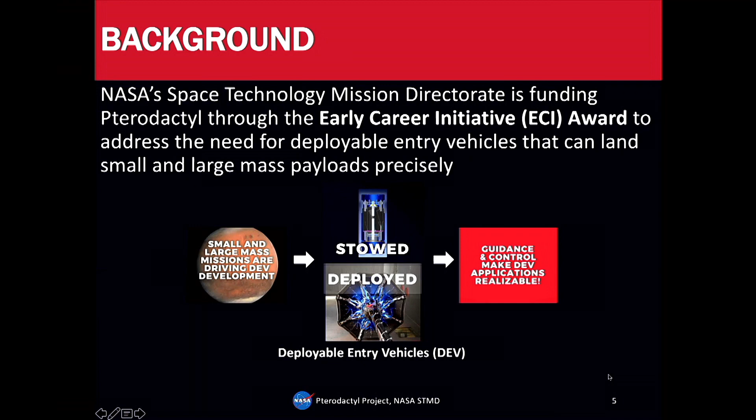So if you're on the moon and you want to send a sample back, or do something cool, and you don't need a large spacecraft like the Apollo capsules, there's a new class of vehicles that can achieve this called Deployable Entry Vehicles. These small and large missions are driving this. A deployable entry vehicle doesn't have that rigid body like the Apollo capsule, which is stowed and then deploys during entry. The one we're working with works like an umbrella - stowed like an umbrella, then deploys during entry.

The challenge with these vehicles is they don't have a rigid form. Imagine a bowl with a lid, like Tupperware - it has a rigid form, so you can put things on the back of it, you can stick things there. Well, these don't have a rigid form, and traditionally entry vehicles were controlled by putting thrusters on the backs of these vehicles. That's how we've controlled entry vehicles for as long as I can remember.

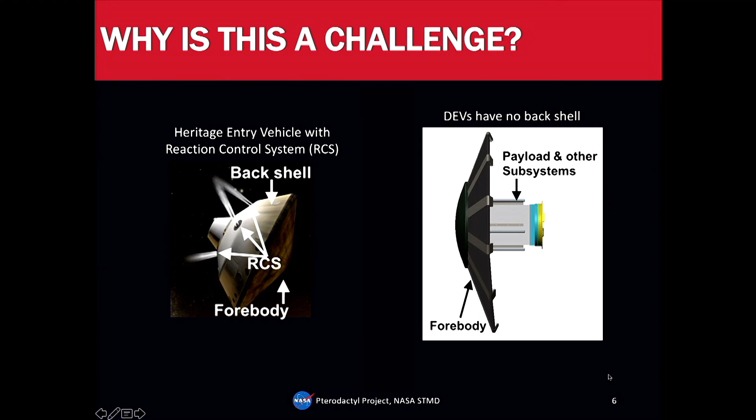So DEVs have no backshell - you have your payload and other subsystems in the back, and that's the forebody. So how do you control this thing? The research question we're trying to answer is: what control system can be integrated into the DEV to enable steering to a target location precisely? Remember, we want to improve precision landing.

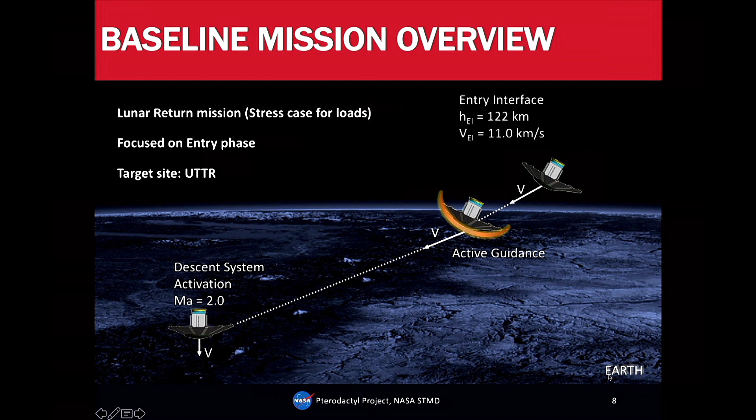Here's the baseline mission we're looking at. On the left side, you see the descent system activation. On the right side, you see where active guidance starts. When you think about entry, there are multiple phases - entry, descent, and landing. We're concerned with the entry phase of the vehicle moving through the atmosphere. We're looking at a lunar return mission, kind of a stress case for loads, which is why we chose it, focused primarily on the entry phase - that's the entry interface, altitude and velocity. We're not concerned with descent activation or the parachute or landing system. We're looking at that footprint, the space where you're supposed to be targeting, and how well you're doing with that.

Offset the CG. But why would we consider this vehicle asymmetric? Can I point with this? Is there a laser pointer? Top button.

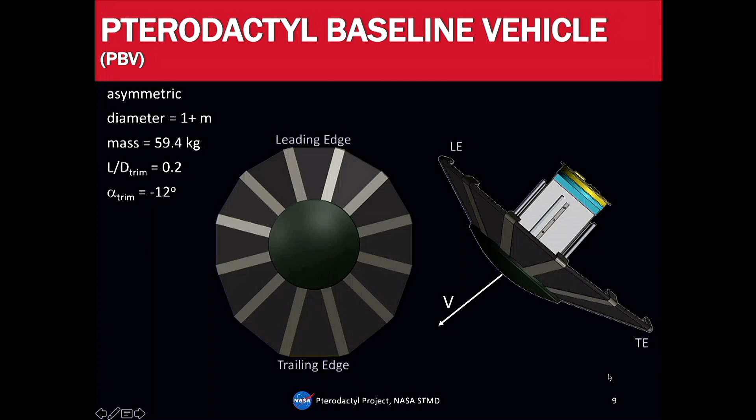So as a controls engineer, I care about, one, taking the aerodynamic data that basically describes this vehicle, taking the mass and inertia properties of this vehicle, and then understanding it. First you want to have an intuitive understanding of this vehicle, what it can do, what are its limits. Create a representation of the vehicle, and I'm going to show some slides about that, and that's just the math. Looking at that vehicle in the previous slide, what does this mean? What can the math about this vehicle tell me about what I can do with it?

Then utilize this information to command the vehicle to follow guidance trajectories. Guidance is where do you want to go, so guidance tells me this is where I want to go, and then I use my controls information to move the vehicle there. It can be position, X, Y, Z, it can be velocity, it really can be any states. I want to command the states to move from where they are now to a desired state. That's what controls is. So now you just got a crash course on controls, aerospace engineering controls.

How many people here are going to be controls engineers?

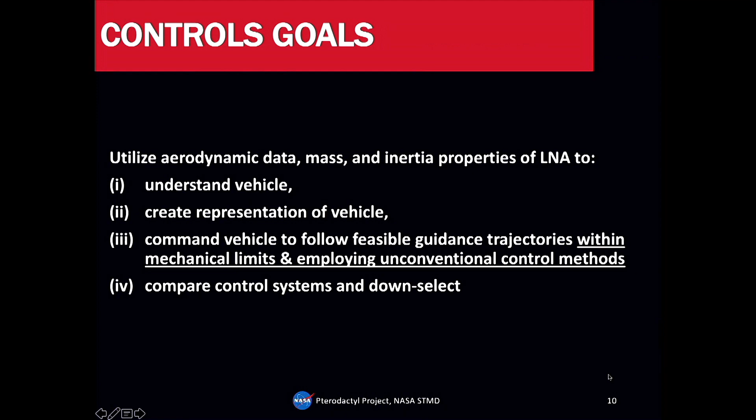So we'll compare the different control systems that we're going to look at. This is more for the group as a whole, and here are the control systems that we examine.

The first one was reaction control systems, as shown for the heritage entry vehicles. What they typically have are thrusters on the backshell that fire, and they can fire in pairs to rotate the vehicle one way or another.

The second is flap control systems. Does anyone who isn't an aerospace engineer know what a flap is in terms of aero? It's like a wing. Have you ever been on a plane and looked out the window at the wings? You see these flaps on the backside going up and down, and you wonder what that is. I had a friend ask me why don't they control those things. I said, those things are used to control the plane. It's mind-blowing, right? They're aerodynamic control surfaces, and when they move one way or another, the plane does something.

Sometimes you'll see the flaps go up on the right side and others on the left side, and your plane will roll, conducting some sort of maneuver. Those are actually control surfaces. So instead of your engines firing, you can put flaps and deflect them one way or another to make your vehicle roll, pitch, or yaw.

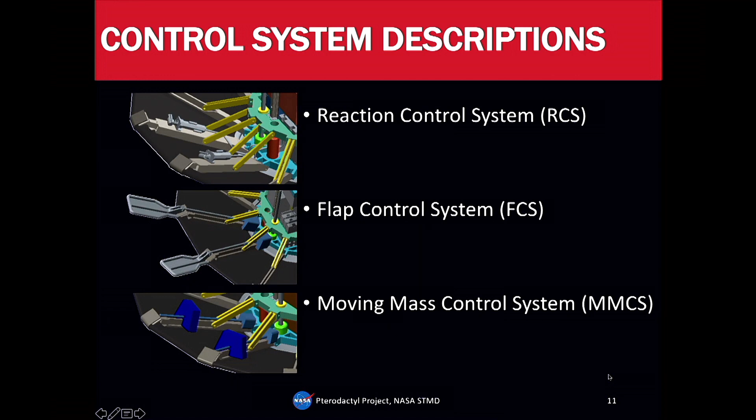Imagine if I didn't have solid footing on the ground and had my hands out like this, and then you place a heavy weight on one end. What would likely happen? It would roll, it would rotate along this axis. So if you move mass from one side of a body to another, you cause it to rotate. You could use that to control the vehicle, rotating and following guidance commands.

So we have reaction control systems, RCS, flap control systems, FCS, and moving mass control systems, MMCS. I might use these interchangeably, I won't quiz you on it, so if you don't remember, that's fine. These are the control systems we look at.

What's the flap design like? If you remember the Pterodactyl baseline vehicle body from earlier, we put flaps on it: 2 on the top, 2 on the bottom, 2 on the right and left. 8 flaps total to increase control authority and reduce multi-axis coupling, because this vehicle is not symmetric.

When you roll or yaw it, you get some coupling in ways you wouldn't really expect, because it's not symmetric. If it was a symmetric vehicle, you wouldn't have as much of that. And to reduce that—we already have a question: why was it designed asymmetrically?

There is a symmetric version of the vehicle, but this gets a little interesting. Because it's asymmetric, the lift-to-drag ratio, the L over D, is higher. And when you have a high L over D, the vehicle was actually designed to follow bank angle commands, so you can do more in terms of guidance. That's why they added the longer gore and the ribs on the bottom.

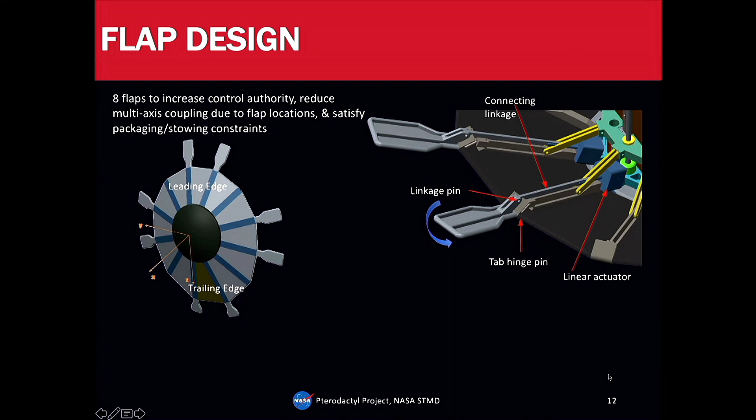The asymmetry will manifest in different ways as you go through the design process. But from a flap design standpoint, or from a controls standpoint, I didn't really care about the asymmetry itself. What I cared about is how much control authority could I generate. The flaps had to be sized big enough that when I deflected them, they could do what I wanted the vehicle to do, to fight any coupling or deal with issues. That's really what I cared about.

Because what I'm thinking is the flaps on the lighter side would have to be bigger than the ones on the heavier side, correct? Possibly, if you're trying to generate equal and opposite commands, but you might not, right? There's some L over D consideration. What if you want to perpetually remain in this orientation, then you might not need to pitch up as much as you need to pitch down. So it depends on what the goals are, and that's why there's this interplay between guidance, where you're trying to go, controls, how you get there, and navigation, where you are.

Yeah, these are great questions. So this is what the flap design is. Just some more information about the vehicle with flaps integrated, and then the flaps can go from -45 degrees behind, to 20 degrees into the flow. These are just aero, packaging, and aerothermal constraints. We're talking entry, so if you go too far into the flow, you start to have heating restrictions and shock waves and other things induced in the flow.

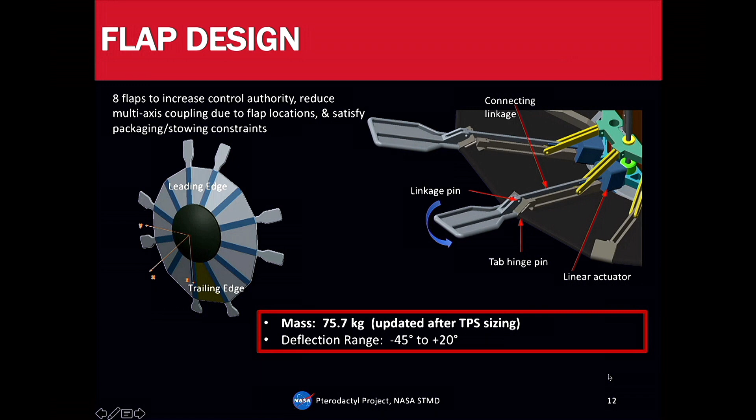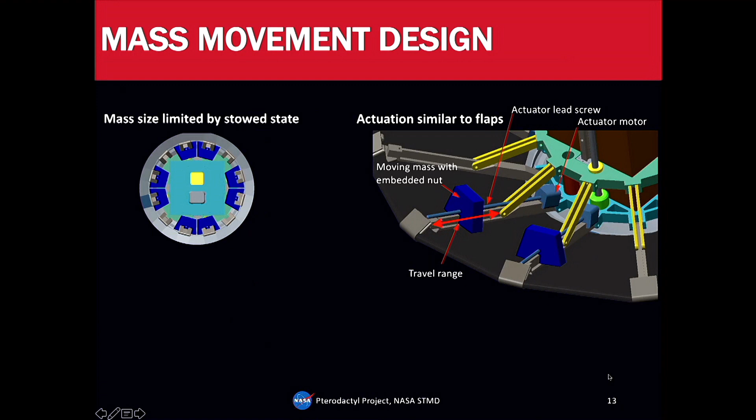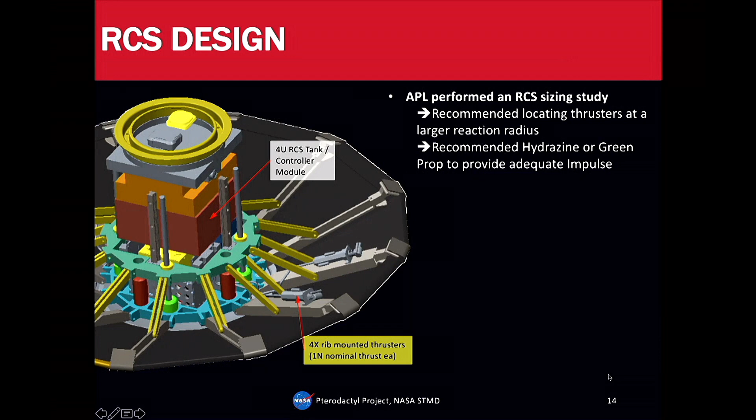So this was a bound placed by us for the vehicle based on packaging and aerothermal constraints. The moving masses, similar to the flaps, we put 8 of them on there, with actuation similar to the flaps, and mass size limited by the stowed state. First cut starting. Same with the RCS, we had APL do the sizing study for the reaction control systems, and they recommended locating thrusters at a certain reaction radius, as well as the kinds of impulse requirements we would need. So we have 4 rib mounted thrusters that can generate 1 Newton nominal thrust. Don't worry about that detail, but basically this is an overview of the flap control systems, the reaction control systems, and the moving mass control systems.

So I talked about bank angle commands for guidance. Heritage systems would typically do bank angle, where basically they're changing one of the important aerodynamic parameters, the bank angle, to modulate lift. So you have your velocity vector, and if you change that angle, you can change the direction the vehicle is facing or where it's going.

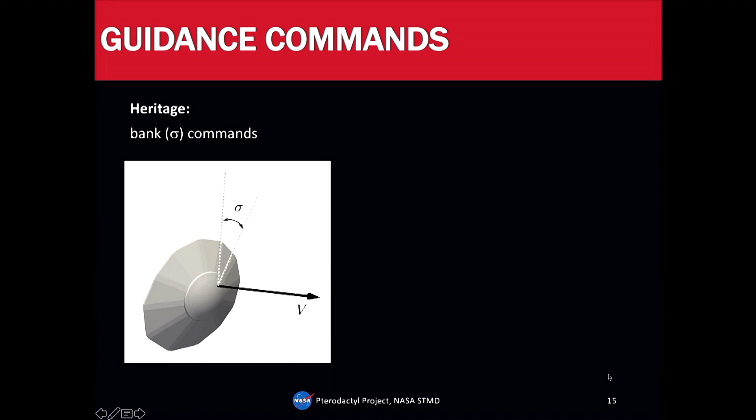But you can also do another thing, where instead of just that one coupled angle moving your lift vector, you can change your angle of attack, which is how you're pitched up, and you can change your side slip. If you want to increase your downrange, you change your angle of attack. If you want to steer left, you change your side slip. So remember: angle of attack is for up and down, and side slip is for left and right. This is an alternative to what heritage vehicles typically do for guidance. So you can do bank, or you can do alpha-beta, which is angle of attack and side slip. I'll typically just say bank or alpha-beta.

We started out with this baseline vehicle that already existed. We're calling it the Pterodactyl baseline vehicle because we had to make some modifications to it. That baseline vehicle is based off a lifting Nano-ADEPT vehicle.

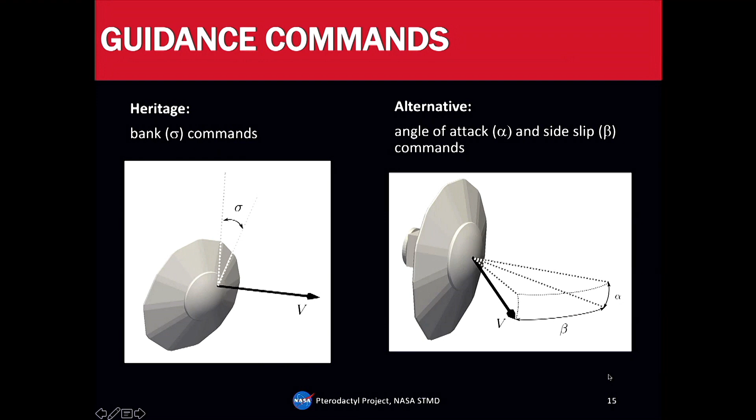So we took that base vehicle and went through the packaging, the CAD models, and basically came up with something where we could add the flaps, RCS, and MCS.

We started with the baseline vehicle because we were concerned about what we were trying to do. We weren't designing a deployable entry vehicle, but designing a system that could control and integrate a control system on an entry vehicle. So we had a starting vehicle to work with, which raises an interesting question: give me a deployable entry vehicle, or any entry vehicle at all, and I can control it in unconventional ways.

So flaps, moving masses, and RCS give us the capability to do alpha-beta control or coupled downrange control. For the flaps, it's the flap deflection angle into or out of the flow for each of the 8 flaps. For the moving masses, it's how far you move each mass along the ribs—imagine this umbrella with masses on each rib that you move in and out to control. For the reaction thrusters, it's simply firing on or off. Those are the control outputs.

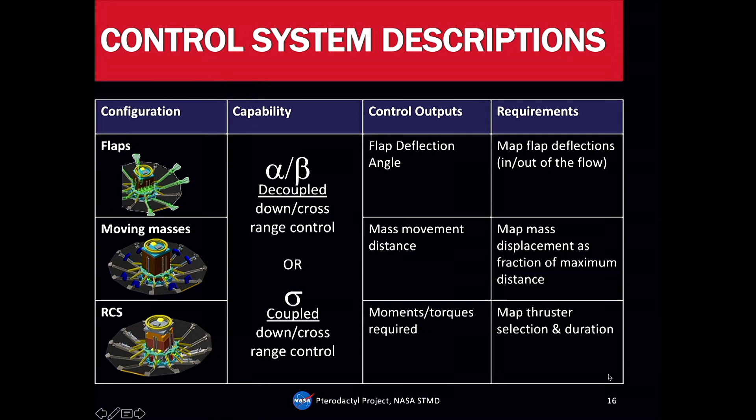For one, you have deflection angles. For the other, how far are you moving the masses. For the third, are you firing on or firing off.

I assume you have software that's going to calculate your thrust and the duration of fire. Where is that located? Is that software on the vehicle or somewhere else? I will get to that.

But that really is the crux of this—you have all of this information, so how do you simulate it? Entry systems are pretty simple in that they don't require a significant amount of onboard computation. It's typically done on board, but you have all these pieces from different places: aerothermal, aerodynamics, controls, guidance, all working together. A lot of this is done offline, which is what I'm going to show you, and then it becomes a relatively simple, easy computation that can be done on board.

So we have all of that information, and then we want to develop a simulation model to design control, now that we have all these different pieces. Where's the math? Who's excited about the math?

Yes, okay, so this is Aero 101 that I got from the NASA website. I was putting these slides together and thought, I don't really know my target audience, so let me just give you some—you're gonna enjoy this. This is publicly available information you could teach kids, literally, like forces and moments on a plane, and you can teach yourself too. I didn't like math growing up, but this stuff is easy.

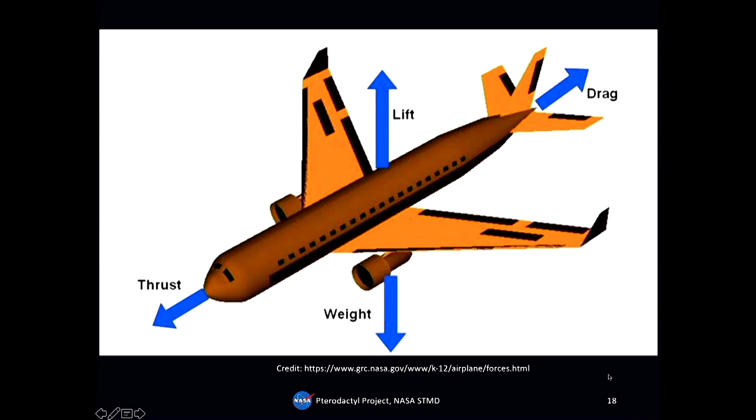Remember those flaps I talked about? Next time you're on a plane, look out the window at the wings—you'll be mesmerized by the way these things move up and down on the edges.

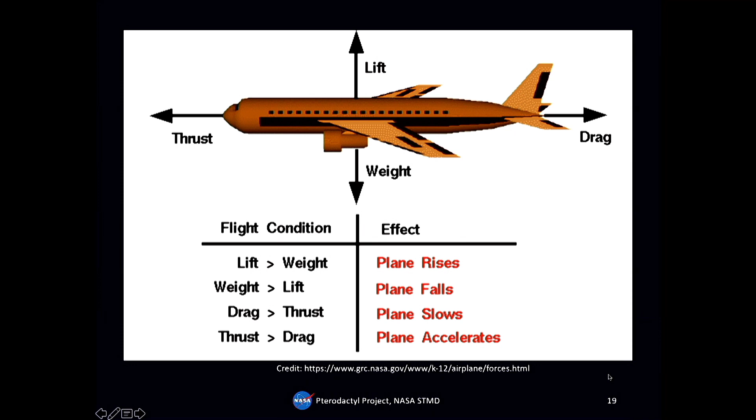When your lift is greater than weight, the plane goes up; when it's less, it goes down. When drag is greater than thrust, the plane slows; when thrust is greater than drag, the plane accelerates. F equals ma—force is mass times acceleration. Okay, you're with me? Then there's more—I showed forces in different directions, but there's more.

There's roll, pitch, and yaw. These are called moments—or what's another word for moments that mechanical folks typically like? I'm an aero girl, so I call them moments, but mechanical people call them torques. People are more familiar with torques—they've heard of a torque.

A torque is a force moving through a distance, right? So put weight here, that's a force. Boom, that's the distance. So force moving through a distance, that's a torque or a moment. Depending on what direction that moment is happening is what determines if it's a roll, a pitch, or a yaw. But they're all torques, they're all moments.

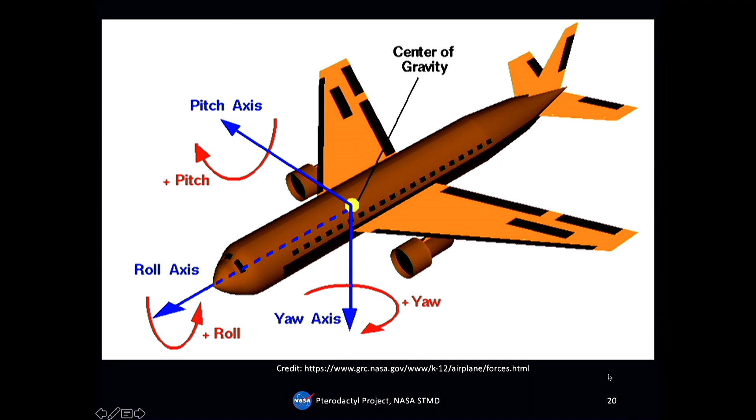A roll is a rotation about kind of like the nose coming out. This is a really great way to explain it. If your plane is like this, this is a roll when it's doing this. Can everyone see that? This is a pitch. And then this is a yaw.

So your force is basically just this or that, but depending on what axis you're rolling around, that's roll, pitch, and yaw.

So I put this here to show, before I get to the equations, that I'm going to show some equations, but I don't want you to get hung up on them. There's just a few key things I want you to take from these. Don't ask me about these equations, it's going to take 3 hours to get to all of this.

I just want to show you that this vehicle can be represented with a set of equations of motion. These equations of motion are typically nonlinear, but they are dependent on the forces I just showed you - drag, lift, and side forces - and the moments I just showed you. That's what's key, these things go into the equation. So when you talk about representing a vehicle, you have to understand how that vehicle depends on these things, what all goes into its representation. So it falls out of the math.

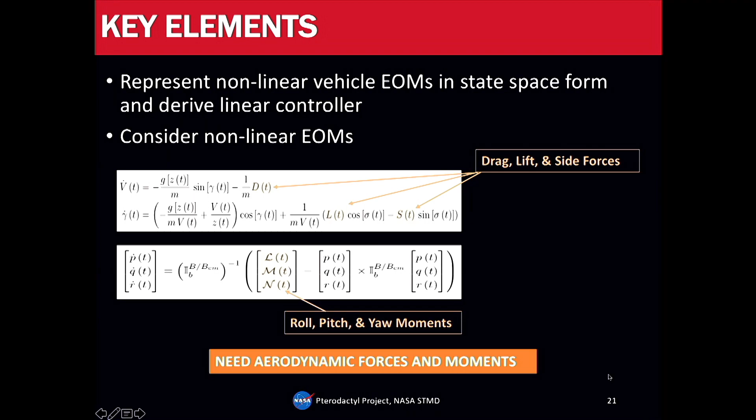So you need those aerodynamic forces and moments. These equations are pretty standard for an entry vehicle. What changes is what those aero forces and moments are that are going in. What is the inertia? What is the mass distribution? Inertia is how mass is distributed across a body, through a body. So what are those parameters that change? That's what really changes, because all these things go in here, and a vehicle will differ from another vehicle depending on what you fill these equations with.

And so these forces that I talked about - side force, lift force, drag force, roll, pitch, and yaw moment - they have coefficients. An aerodynamicist will give me these coefficients.

And for an aircraft, because we don't go that fast through the atmosphere - I mean, you might think we go pretty fast, but we don't - it still takes us 6 hours to get to DC.

6 hours. Deb, 6 hours. Why am I in a plane for 6 hours when the technology exists that will get me there in an hour and a half? It's just a little loud. But people don't like that it's loud, they complain. This is a true story, they actually complain, that's why we don't do it. Congress passed a law that says you cannot fly supersonic over the continental United States. But it exists. So next time you're stuck in a plane for 6 hours, just know it's because people complained that it's too loud and their dogs and cats are going crazy. True story, it's in the papers.

But airplanes don't go really fast, so your aerodynamic coefficients don't depend much on that. They really just depend on things like angle of attack, pitch, and deflections.

But when you get into space, spacecraft entry, there's a lot that's changing - your Mach number. Who knows what Mach is? It's heavily dependent on speed, but it's in relation to the speed of sound.

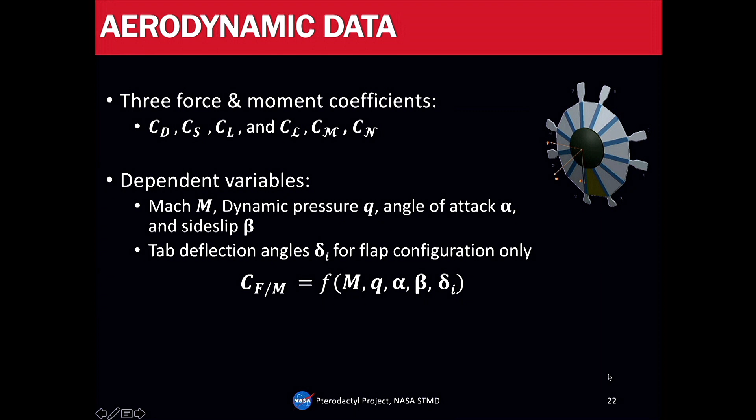So you need your aero forces and moments to characterize the vehicle and design the controller. Your aerodynamic forces and moments are dependent on these coefficients, where these coefficients have dependencies on the baseline vehicle, and they also have dependencies on the flaps when you're looking at the flap configuration. So if you're not looking at the flap configuration, these terms on the right side just go to zero. For the flaps, because they're aero surfaces, they also contribute as well.

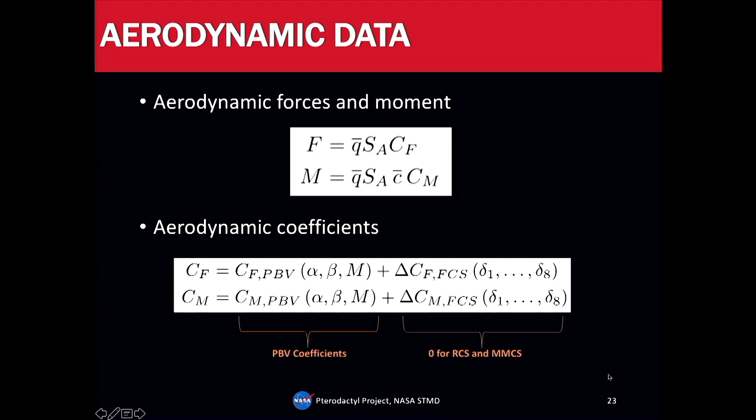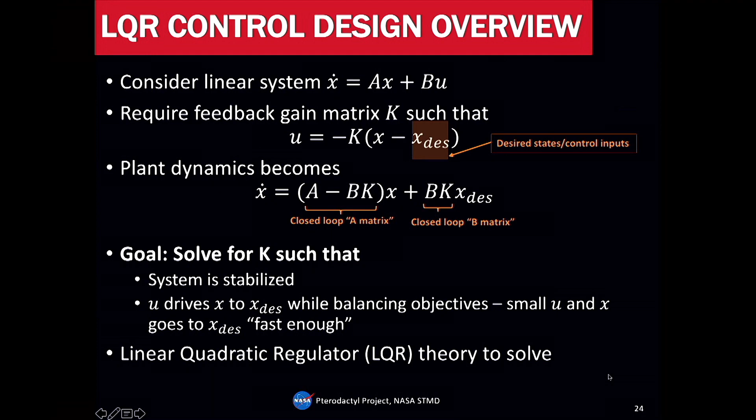What are the objectives? How fast you want to get to X desired. You're here, you want to get there. How quickly do you want to get there? Do you want to leap, or do you want to walk slowly? These are all things that you, as the controls engineer, want to figure out: how fast do I want to get there, and how much energy am I going to use? How much control effort am I going to use? What's worth it to me? Is it worth it to jump and be out of breath and then come back here? Maybe, maybe not, if I'm going to jump and then just go home. But if I have to come back here and speak, I'm probably just going to walk. So you're balancing all these objectives.

That's what controls is. It's so cool, right? It's like, how fast do you want to get there? How quickly do you want your states to get there? How much control effort do you want to use? These are all things that go into that. And you work through all of that so that you can get your control design.

We did this linearization split based on something that I did in my thesis for my PhD, such that each time we get an update from the aerodynamics team—remember, this project is multiple people working together—the aerodynamicist gives me info, and I'm like, okay, this is what we can do with this vehicle. Then I pass that onto the guidance team, and they run the trajectory knowing the limits of control, and we check if it's good enough, and then we work back. It's a very, very iterative process. So each time the aerodynamicist gives me info, I can work through that entire process, or I can split it such that it's not everything that's changing at every time.

So this is really, really cool, and I'm going to show some references if you have questions. This has all been published since my PhD days a few years ago, so it's public information, and you're not basically linearizing each time.

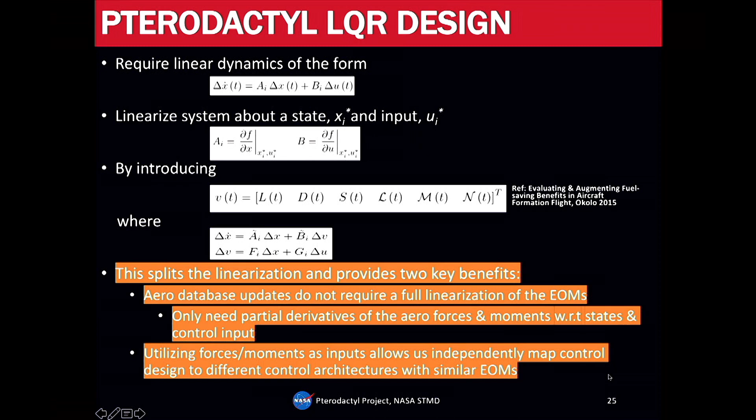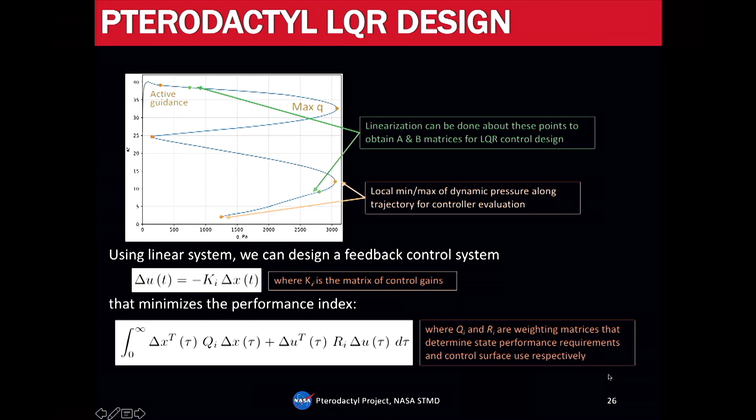If you think about that entry phase I showed you, during entry the vehicle goes through different Mach numbers and different dynamic pressures, M and Q. And you can, like I said, linearize your equations of motion and then evaluate at different points. Your vehicle is represented by a set of nonlinear equations, but you want to design a linear controller for them, because linear is good—linear is easy, right? So you linearize in a region and say, this is valid in this region.

And then you can test it in another region and see how well you do. For most entry vehicles, because things aren't as crazy, you're usually fine. If you linearize here, you can usually fly here with the same assumptions you made, and things kind of work out. So you can pick a point and linearize. We did two, but we ended up just using one because one worked fine.

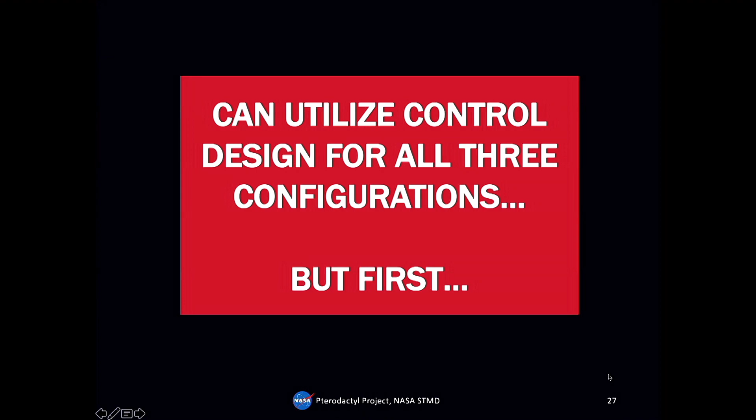And then you can utilize that controls design for the three RCS, FCS, and MMCS control systems. Who remembers what MMCS is? Moving mass control systems. Yes, you're with me. Okay, so you can utilize the control design for all three configurations.

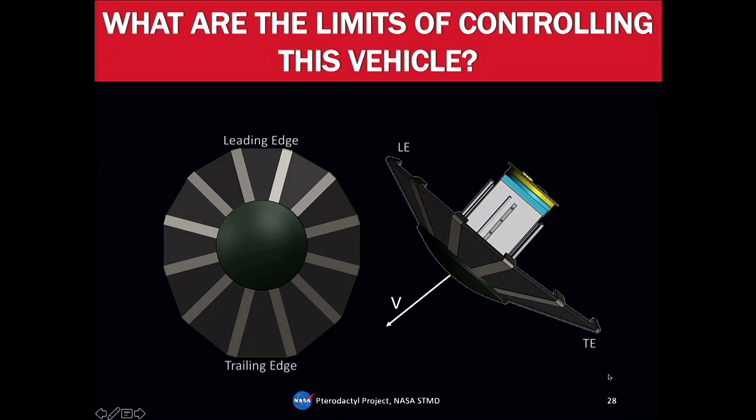But first, we want to understand in what regions can we control this vehicle? What are the limits of controlling this vehicle? This is going to get into that asymmetry versus symmetry conversation, and where we're limited, and what happens when you try to control, and what are the things that happen. So what are the limits of controlling this vehicle before you even start the process?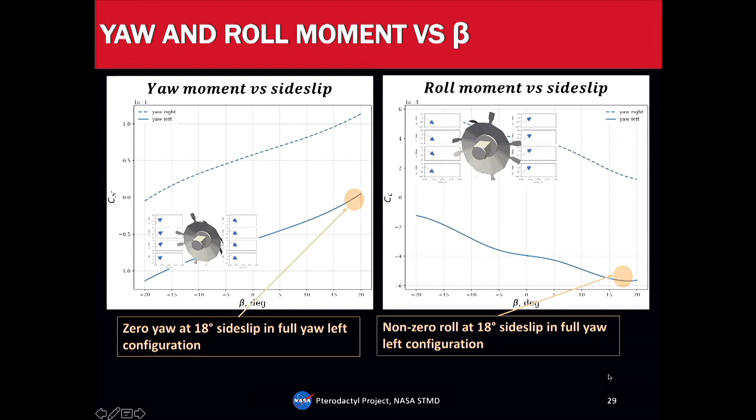But we designed these controllers to ideally be able to do alpha and beta. We weren't thinking about roll. So what does that mean for us? Yaw induces a roll moment that the vehicle needs to trim out.

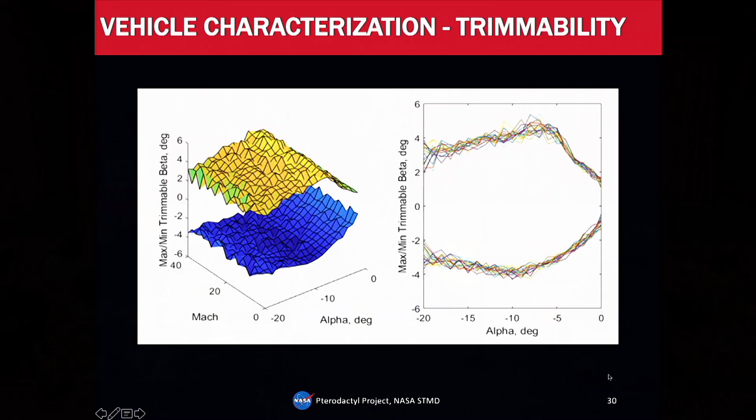And this is just some additional plots saying, as a result of that roll moment that the vehicle needs to trim out, your side slip range is limited. So you don't want to yaw too much and then induce a roll that you can't control, because you didn't design to be able to control that roll. So now you kind of limit yourself in terms of side slip so you don't induce as much.

And then when you limit yourself in terms of side slip, how good is your performance? How good is that guidance trajectory that's really depending on it? Your guidance is thinking you have more to work with, but you don't. So what does that mean for you?

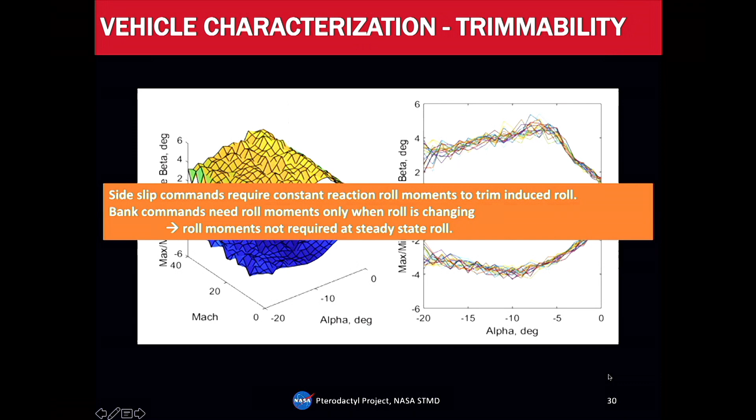So basically, with the vehicle and the configuration we looked at, the side slip commands require constant roll reaction moments to trim. And that's for alpha, beta. Remember I said there was bank angle command and there's alpha, beta. Bank angle requires roll moments only when the roll is changing.

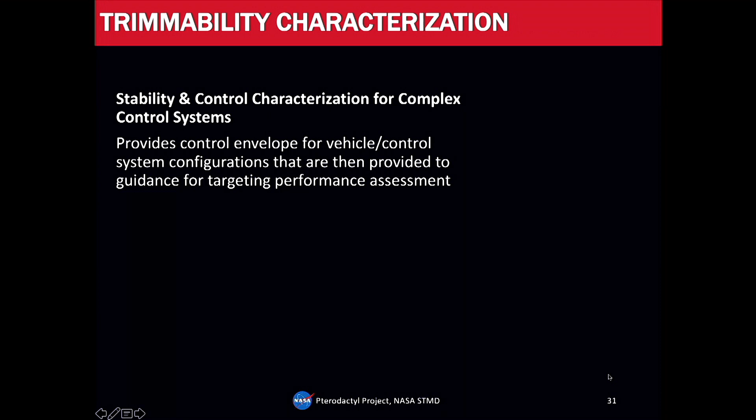So what we showed with this trimmability characterization, how well we can trim, is that the control envelope for where the vehicle can trim will guide where guidance goes. What does your guidance trajectory look like? How far can you go? Because we're telling them now, okay, we can't go as far.

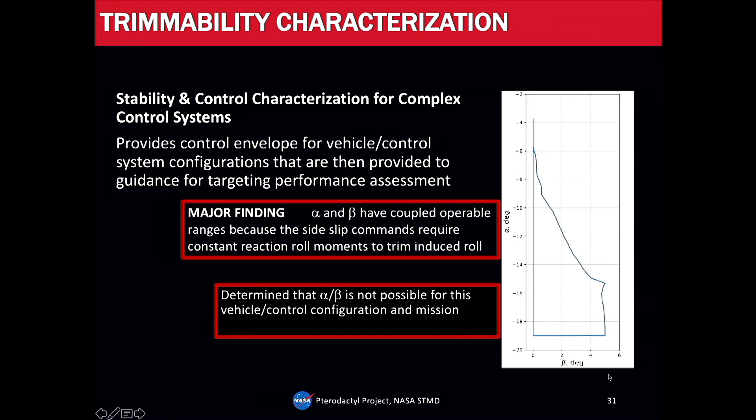The big finding is that alpha and beta have these coupled ranges due to that roll-yaw coupling. Our window here is where we can operate successfully, and this window might not be sufficient for an optimum guidance trajectory. So alpha beta is not possible for this vehicle in this control configuration.

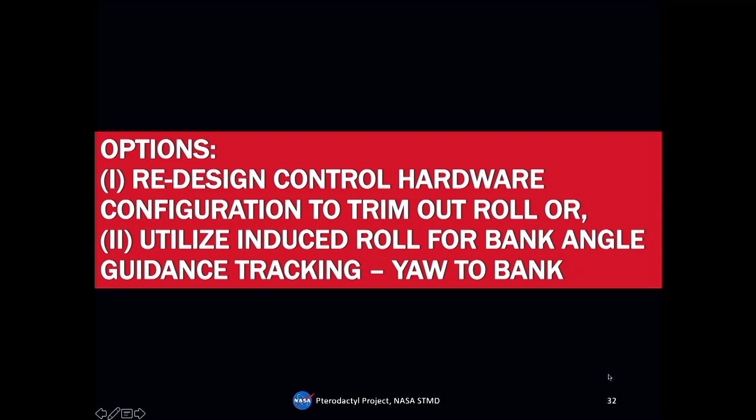So we can either look at bank, utilizing the induced roll for bank—remember I said we have bank and we have alpha beta, that vehicle was designed for bank with that asymmetry—or we can redesign the control hardware to now have the ability to trim out any roll that's induced. For these results, I'm going to show you the latter. We're working on doing the former now, and maybe that'll be another presentation.

I don't know if I have the bandwidth, but we're working on modifying the control system to say, okay, now we're only going to do bank. Same thing, we're looking at the flap deflections, the moving masses, the jets on and off, and saying how well can we follow bank angle commands of rolling.

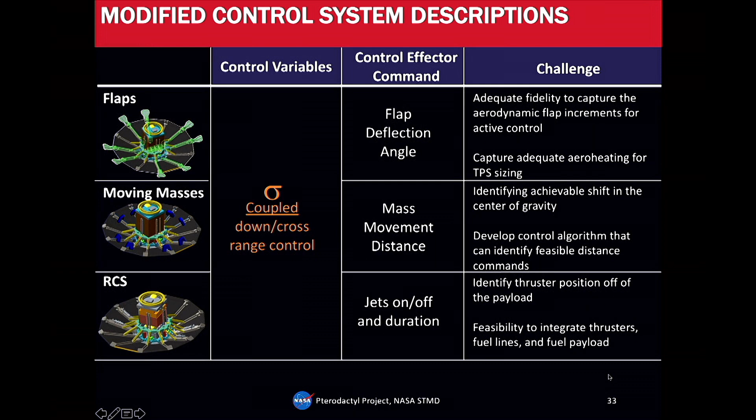So this roll is a problem, but how can we use it to our advantage for bank angle guidance trajectory tracking? So we did this yaw-to-bank architecture and control design where we take our gains that drive the bank angle and convert them to basically a side slip. We know we have this coupled side slip roll interaction. Now we take that side slip command—there are papers on this, I'll show the references, so you can take all the pictures you want, or just go get an AIAA paper. So you take that bank, convert it to the side slip command, and that side slip drives your bank angle utilizing that coupling.

Question: If you get into an uncontrollable pitch or roll, would that lead to a perpetual motion situation? Yes. Not much friction in space? Yes, yes, you can get it.

And a lot of that characterization can be done way beforehand. There are things called stability derivatives, static stability derivatives, dynamic stability derivatives, that should either be positive or negative. If it's negative, how negative is it? If it's positive, how positive is it? And if you're not stable, the linear quadratic regulator design that I showed does two things: it'll control and it will stabilize. Ideally you should be able to control and stabilize, but you can check those things, because if you're not stable and you get into a mode like that, you can start to roll to infinity and that's it. So you can check it before you fly—check, remove before flight. You can check these things beforehand.

So that's what goes into understanding the vehicle, that intuitive understanding, because it's garbage in, garbage out. If you don't understand the vehicle, if you don't understand what you're doing, you start with uninformed physics. These equations exist, you can always go through this process, but if you don't understand, it's garbage in, garbage out. And then you have a problem that you're having to explain to the world.

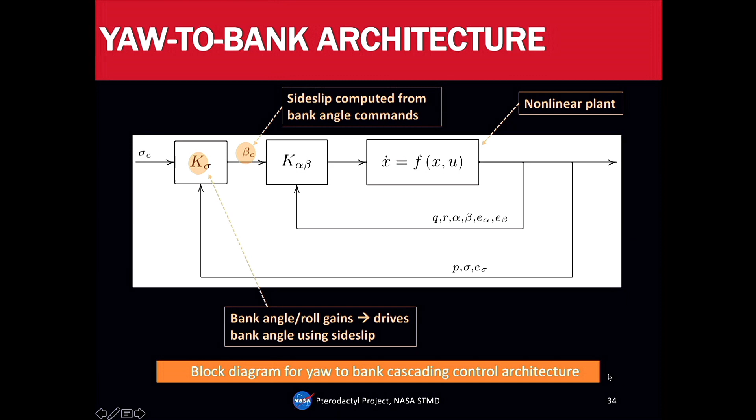So we did that, used that control design, and then developed this control comparison metric to compare across all three designs—how well are these control designs in comparison to one another. And we looked at the bank angle acceleration.

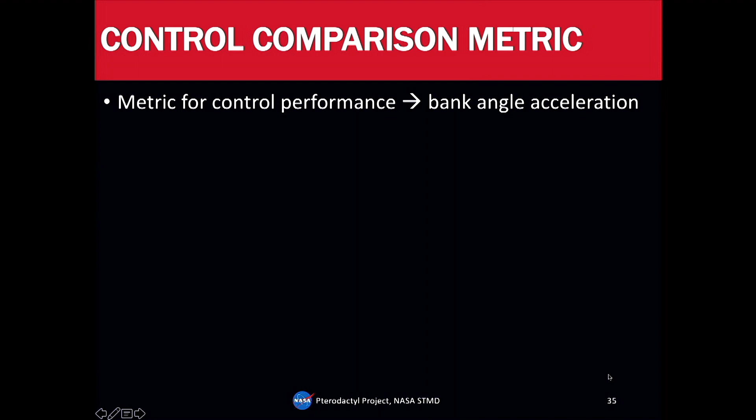Question: Sorry, this is a misplaced question. No—the flaps, the only thing you're controlling is the extent or length to which they're deployed, or do you also adjust the angle? The angle only, actually. So the length that they're deployed is fixed, and then it's the angle into the flow. So we don't control how far—that was one of the options.

Can you pivot also? That will fix the roll problem. So that's what we're doing—that's what we're doing next, actually. If you pivot, the flaps, you can imagine them like this, they're just going into the flow, so they generate a force. They're not able to really generate a force in this direction, so you can't roll or force them that way—I'm getting my 3D mixed up now. But if you were to pivot, you're going to be able to generate more control authority in an additional axis. So instead of really pivoting, what about a twist, like these propellers? That's what we're looking into next, that was the next step, and we're working on it. I had meetings today talking twist angles and cant angles and all of the options. We had time, we had money, so we went crazy. Yeah, but that's a great question.

So we look at bank angle acceleration for how well we're doing. This is a plot of during entry, your Mach number versus your dynamic pressure. Imagine the vehicle going through this—this is just like a sample guidance trajectory.

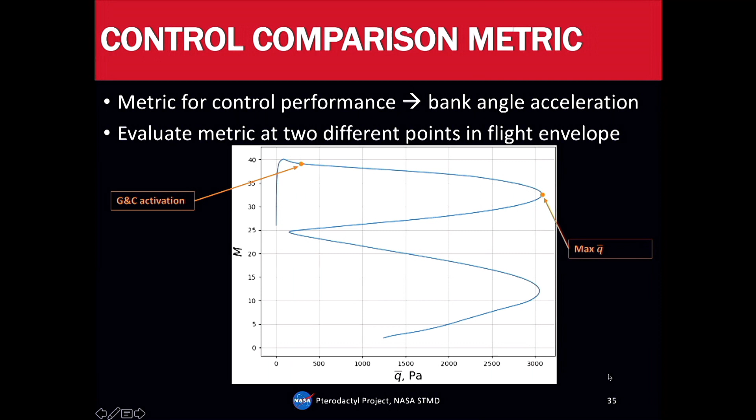We evaluate that metric at 2 different points of the flight envelope, basically how quickly you can accelerate using each of these systems, the bank angle acceleration, using those 3 control systems, and see how well you're doing. We saw that the RCS has a bank angle acceleration capability of about 11 degrees per second squared, where the minimum you have to have is 5 degrees per second squared for a good trajectory. So RCS is good, but RCS better be good. It's heritage, it's what everyone's been doing, so it will be good.

Then at max Q, we see that the flap control system is 115, and the MMCS at max Q is 13.8. Remember, our bar is 5. So we have these flaps able to get us so much more. At max Q, for the FCS, MMCS is good, RCS is also good.

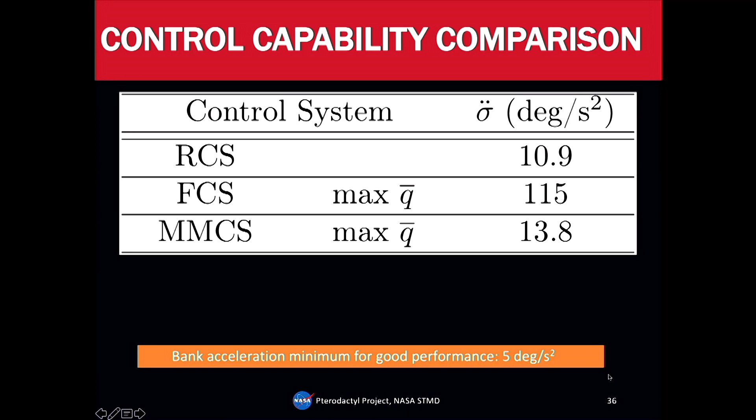But then at G&C activation, max Q is important because it's basically an artifact of your aerodynamic control surfaces depending on dynamic pressure. If there isn't enough pressure, your air control surfaces really can't do anything. So max Q is really important, but what happens at G&C activation in terms of these thresholds?

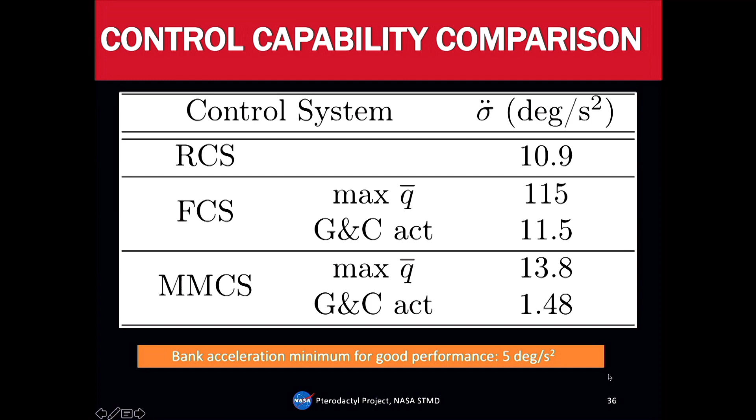At G&C activation, your FCS is still fine, it's 11.5, but your MMCS is now 1.48. You are not able to achieve that bank angle acceleration for these vehicles, for this configuration, to meet even the limit of 5. So automatically, this has got to go, you throw this out. We're comparing these 3 - if this isn't going to work at G&C activation, it's not great enough.

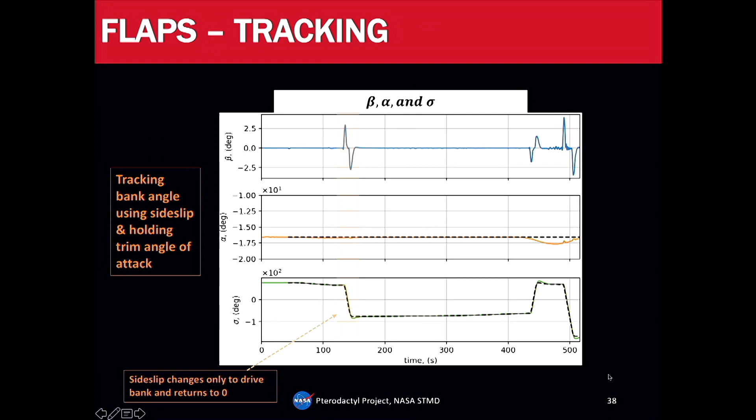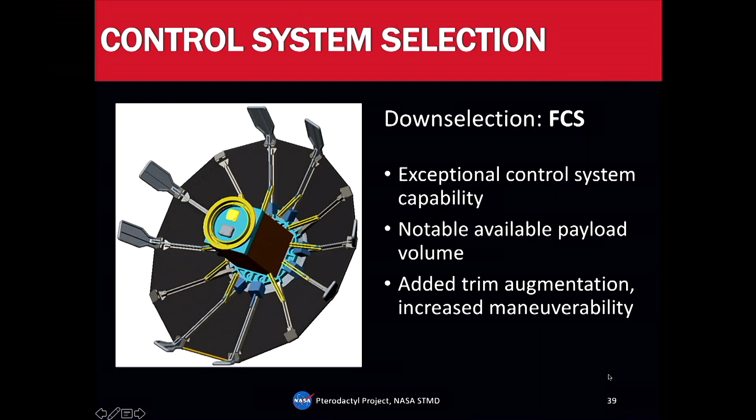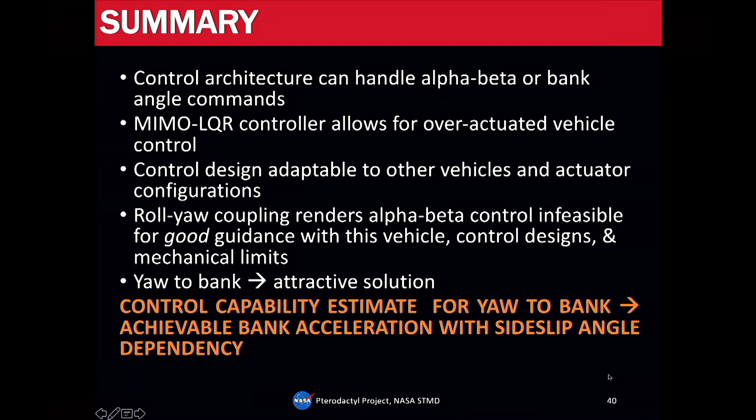So in summary, we designed this control architecture that can handle either alpha, beta, or bank angle commands. It's a multi-input, multi-output linear quadratic regulator controller that allows for over-actuated vehicle control. Multi-input means there could be 8 flaps, and multi-output is like you're controlling 3 things - alpha, beta, bank, for example. This control design is adaptable to other vehicles and actuator configurations.

The roll-yaw coupling renders alpha-beta infeasible for this vehicle, this control, this mission, and mechanical limits. The Yaw-to-bank was an attractive solution for this. So the control capability estimate for Yaw-to-bank was the achievable bank acceleration with that side slip dependency. Yaw-to-bank basically leverages the roll-yaw coupling inherent with the vehicle to achieve increased maneuverability compared to the heritage RCS. FCS has the highest bank maneuverability, like I showed - 115 at max Q compared to the minimum that we need of 5.

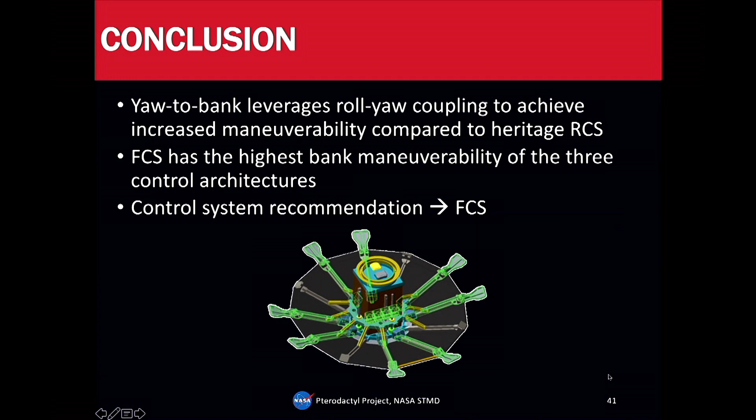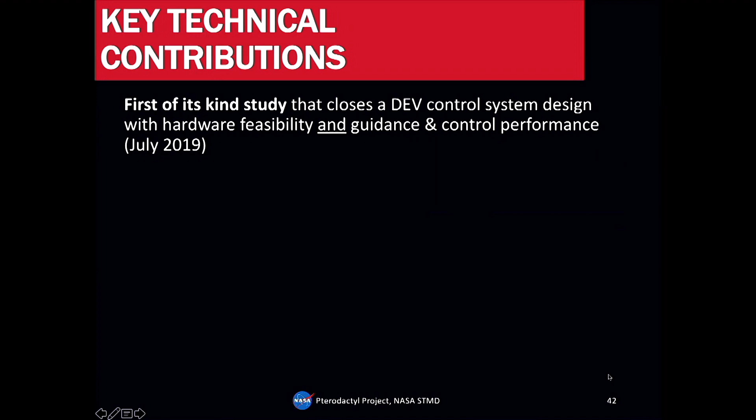The control system recommendation from the controls guys is to go with the flap control system. The key technical contributions of this work - it's one of the first that really closes a DEV control system with hardware feasibility and guidance and controls performance. It's a really big deal, I'm really proud to be a part of this effort. There have been other studies with some assumptions made - we assume we can control roll, or we assume we can do this, or something will take care of it - but we kind of run the gamut and go through start to finish what can be done.

The impact is this enables further applications of inflatable or mechanical deployable entry vehicles for science missions and high mass missions to Mars and beyond.

This tool set can be applied to any vehicle or control system. This work that's been done is not just for DEVs. You can go through the process of doing this for any vehicle control system type.

Do you have a question? Are any rare metals used in the construction of these vehicles? I'm unaware, I don't know. I'm not a structures person. So your question is, are any rare metals used in the construction of spacecraft or deployable entry vehicles in general?

Yes, he might have an answer. You want something light, strong, and sometimes it's beryllium. Yeah, beryllium, he said? Yeah, I don't know, that's why I'm a controls girl, not a structures person. I don't know what material will work or break, but ask me a controls question and I'll hopefully have an answer for you.

There's a lot of work on the TPS, thermal protective system, side at NASA Ames Research Center. The big thing with these vehicles is withstanding the thermal environments they're subjected to, and we have arc jets that do a lot of testing. The big one we use is called HEAT, and even that is an acronym. So yeah, we're really pushing the frontiers with lightweight enough but thermally resistant material.

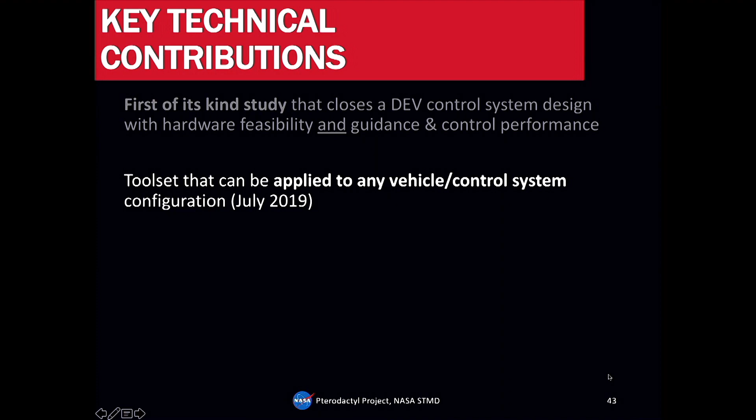Fascinating, how would you be able to simulate that at Ames? The thermal protective stuff I talked about is actually subjecting it to those thermal conditions it will experience. There are studies that show how doing work in simulation with some scaling factor, depending on Reynolds number and things like that. But what we did here is a Python-based simulation for the controls team. I'm a MATLAB girl, any MATLAB people in here? MATLAB is easy, MATLAB works, Simulink works, but this was a Python-based framework and simulation.

So in simulation you can do sims, but then future flight testing and suborbital flight tests are ideal next steps for this project if we get some additional funding. So if you have money, let me know, we'll take it. It's a really cool project with some really exciting results.

By the way, this is an early career project. The lead, the principal investigator, and the core team, everyone leading all of the disciplines, is an early career person. I started at Ames less than 4 years ago, got my PhD in 2015. These are early career people that, you give them money, you give them the opportunity, and we're ready to think outside the box. So if you give me money, we'll take it, per any government regulations.

How does NASA decide whether something should be tackled in-house, like at Ames, versus hiring somebody else to do it, like Boeing? I can't hear you, can you repeat that question? So for a project like this, how does NASA decide whether something needs to be tackled in-house versus just hiring somebody else, like Boeing?

Yeah, so this wasn't a project that NASA said has to be tackled in-house. NASA actually gave the opportunity through the Space Technology Mission Directorate, which said early career people, put your idea forward. We weren't limited to this. There are requests for information, a number of calls for proposals that range across very diverse things. So NASA doesn't really restrict anyone. We weren't required to do this, we just wanted to, we were interested. NASA doesn't restrict their employees or researchers, nor do they restrict outsiders.

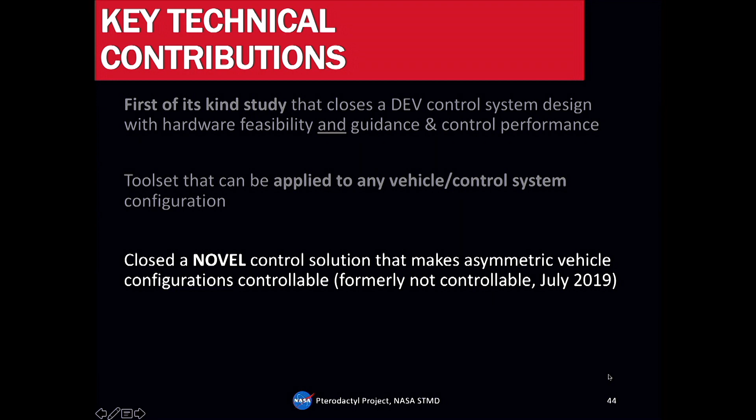There are opportunities out there, and I share all of this because there's so many ways to get in and to do really exciting work. I'm going to run through the summary of the key technical contributions: closing a novel control solution that makes asymmetric vehicle configurations controllable, and demonstrating the feasibility for vehicles not previously considered, non-traditional entry vehicles that can better serve mission needs versus traditional systems.

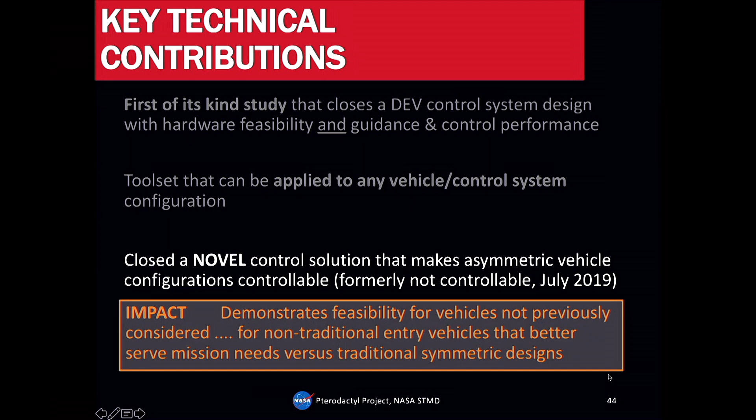So we identified this 100% non-propulsive entry control system. We have built this 6 DOF simulation test bed that will be completed this summer. The project ends in May or June of this year, and we are looking forward to redesigning the flap control architecture to enable alpha beta tracking, and to obtain follow-on funding for hardware prototyping, a demonstrator, and a suborbital test flight in subsequent years if we're able to fund this and keep doing the work.

Here are the references to the papers, so you probably want to take a picture of this, because there's additional information on the different disciplines in here. I'm going to leave this up, so please take your pictures. There are so many papers, especially from AIAA. We had a special session at AIAA SciTech in Florida this January. And if the pictures are done, that brings me to the end of my presentation.

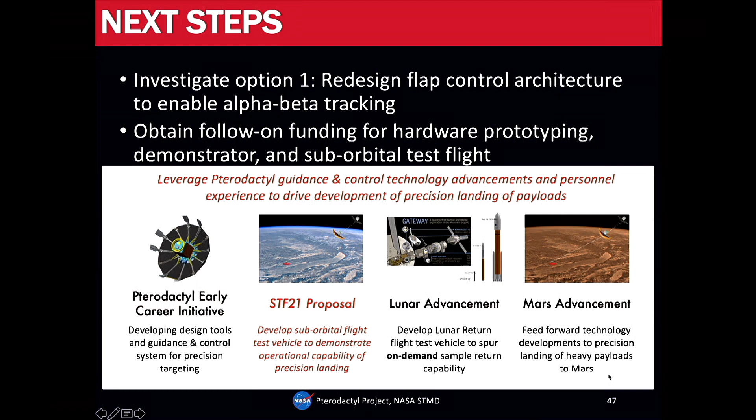So right now we're primarily heavily in the software design and development phase, and like you said, a feasibility study. But this is work that we want to see actually go forward, right? Even if it's not with us, we want to see that go forward.

When will be a first test? Yeah, so the funding ends June of this year, so that's it. Unless you enable... no, I'm kidding. But no, we're doing some work to see if we can get some follow-on funding to demonstrate this.

There was a sub-orbital flight test for the ADEPT, like the baseline, pre-baseline vehicle a year or two years ago, and there's some results on that, public information as well on AIAA. But if we find something to hop on, we can go ahead and do that. This is just primarily software that has taken this much extensive effort from the team as a whole. But it'd be good to do some hardware prototyping and then actually see it fly.

Okay, any other questions? Yes. Which is worse from a controls perspective, direct entry at Mars or lunar sample return to Earth?

From a controls perspective, which is worse? That's an interesting question that I can't fully answer. Here's why: if we're doing FCS, flap control systems, we care about our dynamic pressure and the control authority we can get from our aerodynamic control surfaces. If we're doing RCS, and you just have thrusters, you probably don't really care. But I do recall that the lunar sample return was chosen for the stress loads, but it wasn't done in comparison to Mars. It might have been done in comparison to going there versus coming back. So I don't know, that's an interesting question.